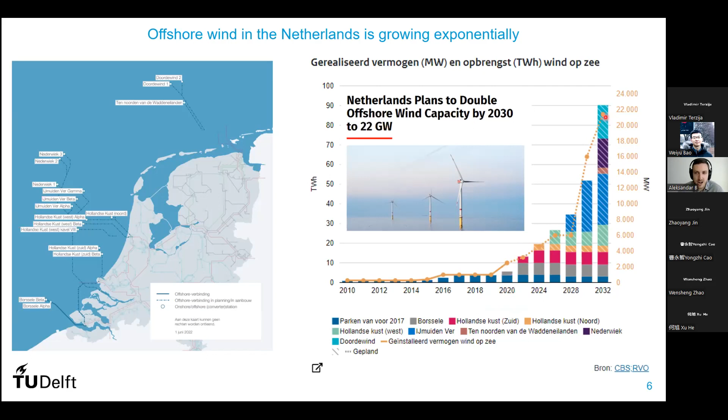So if you look at the plans of the Netherlands in terms of renewable energy, particularly here offshore, this here on the left is the coast of the Netherlands, and here we see the proliferation of offshore wind energy, which is currently at several gigawatts. By 2030, the plan is to have more than 20 gigawatts. So we have a really exponential rise in wind energy, particularly offshore wind energy, and this is something that is really affecting power systems already, and we can only imagine how it is going to affect power systems at this point, which is only 8 years from now.

emphasized and accelerated. I like to call this likely the biggest evolution or revolution in electrical power systems, probably since they were, let's say, invented by Nikola Tesla. But this new revolution is also bringing some challenges, and we as electrical engineers need to figure out ways to deal with them. So what are some of these challenges, particularly the dynamic ones that I'm going to talk about today, that we see with so many renewables?

If you look worldwide, let's say first with Europe, we already see several larger events happening lately. For instance, we had a system separation in Europe, which is operated as a single system, but due to faults, we had not one but several system separations lately, out-of-step conditions, which threatened to cause blackouts in certain parts of the continent.

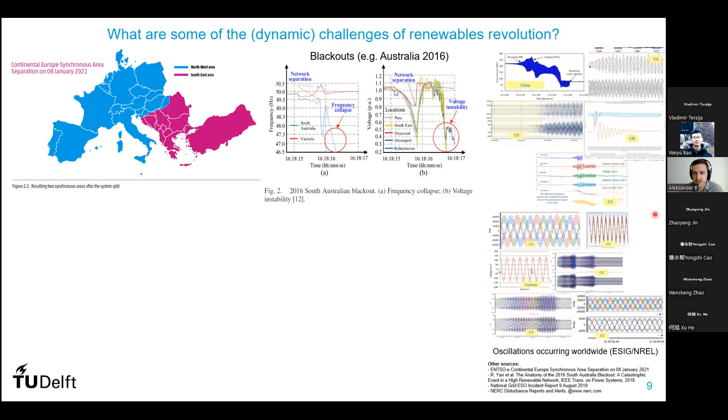If we look at the other events, we see oscillations occurring worldwide, from China to US, UK, also in Europe; in Germany, we saw something with offshore wind energy. Furthermore, in UK as well, there was recently an event where a lightning strike quite far away from an offshore wind farm caused the wind farm to trip, and that kind of cascaded and caused 1 million people to be in dark for some time.

And what we also see in the US, for instance, which is very interesting, is that a lot of renewables are not complying that well with ride-through conditions, and that we see due to that some more risks of cascading. So, for instance, if you go to the NERC website, you'll see a lot of disturbances that have that kind of effect. So there are a lot of challenges that we see, and we are still in some way at the beginning of the energy transition. So we can only imagine how this is going to escalate in the next decade or two.

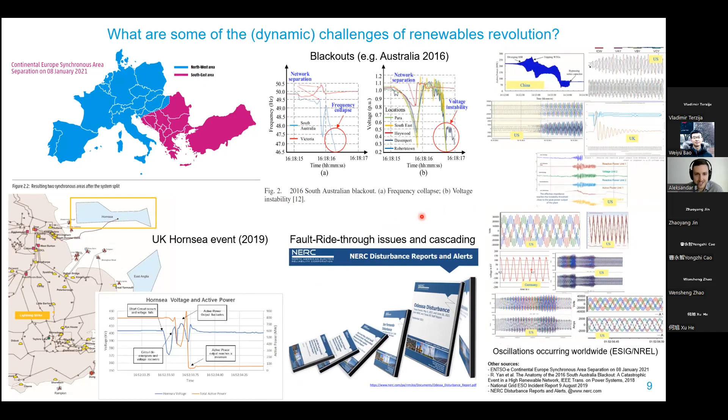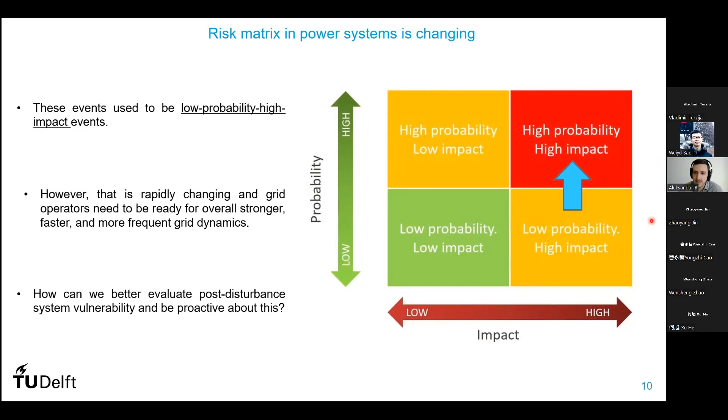So if we think about this in terms of risk in power systems, these events that I just talked about used to be low probability, high impact events, but that is rapidly changing. We see much more frequent events like these. We see them happening faster, and we see them happening with more enhanced deviations in voltage and frequency. And the question that we come to is, how can we better evaluate these vulnerabilities of the system and maybe be proactive about this and be ready once they start occurring even more regularly in the system.

I'm going to give a couple of slides about a bigger project that I'm part of, RESIDENT. So RESIDENT stands for Resilient Synchro Measurement Based Grid Protection Platform, and it is a project led by Professor Marjan Popov, but we have a lot of people involved in it. And the motivation of the project is very much in line with what I was just talking about: the challenges that we're dealing with controlling future electric power grids, particularly in terms of reduced system resilience, in terms of inertia and system strength.

And except for utilizing the known methods and the known ways of handling and tackling these events, we're also looking into applying modern measurement units across the system, such as phasor measurement units, also some sensors that we have in the Netherlands, and combining them into a wide area monitoring approach, but also wide area monitoring, protection and control applications. So we have several work packages in this project. The first one deals with developing a platform for testing all of these applications. The second one deals with some machine learning and AI methods for detection, localization, and classification of disturbances.

We have another work package on controlled islanding to derive a method for coherence identification of generators and detecting out-of-step conditions and doing some sort of a controlled separation of a system, and not allow the system to split in the way that, let's say, it wants, but we could do it in a controlled manner to avoid blackouts and have the separate islands that will operate stably after the separation. And in the end, we have the grid vulnerability and cascading events work package, which is on developing algorithms for vulnerability assessment.

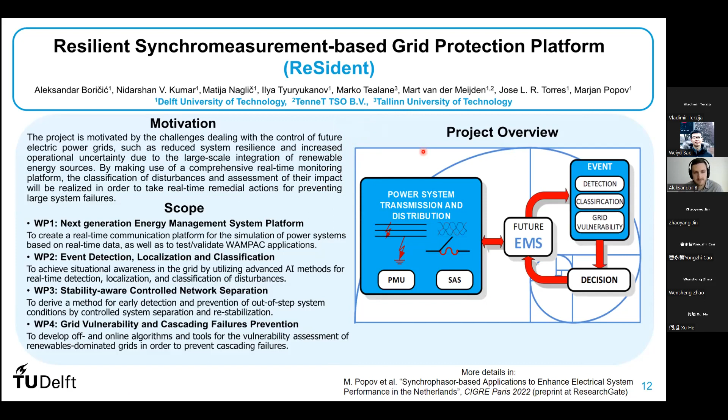If you want more information about this project, we recently had a paper in Paris, in CIGRE. I think that's a very good overview of things we do. You can probably find it online. It's also on ResearchGate if you cannot find it on CIGRE. And there we have some more information about all of these topics that I mentioned.

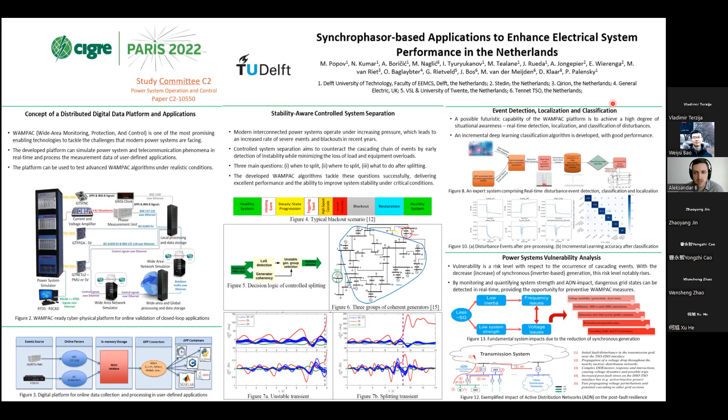So with all this shift to renewables, why and how are systems becoming weaker? Why do we need to think about this more than we used to in decades previously? So it all comes back to synchronous generators in a way. Since we are reducing the number of synchronous generators and instead putting inverter-based resources, on one side we have lower inertia because of the ability of synchronous generators to store kinetic energy in their rotating masses. We're losing that ability with installing inverter-based resources, and that low inertia causes frequency issues.

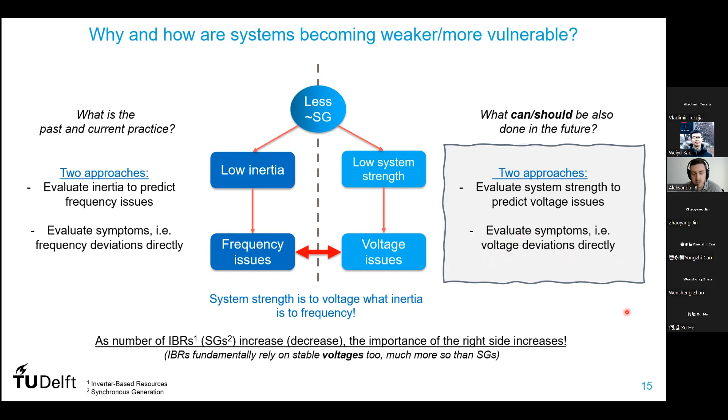So if we look at the current practice in the industry, we have a lot of ways to evaluate inertia, and then also different ways that we can evaluate frequency deviations directly, so we can try to preserve system stability in that sense. On the other hand, what we need to do, and should do more in the future also, is how we can evaluate system strength, so we can predict voltage issues, and on the other hand, the issues themselves, how we can evaluate them. As I like to put it here, how do we evaluate the symptoms, or voltage deviations or instabilities, directly. So I'll be more focusing on this part today.

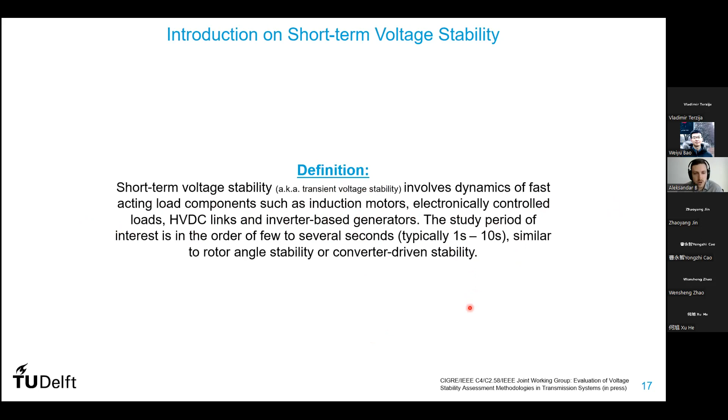So first, I'm going to talk here about the impact of distribution networks on short-term voltage stability. First, a quick definition. This is actually from the joint working group that Vladimir mentioned, that is now in press, and I think it should be published early next year, which works with voltage stability assessment in transmission systems. So short-term voltage stability, sometimes also known as transient voltage stability, but that term is not used that much anymore, involves dynamics of fast-acting load components, induction motors, electronically controlled loads, HVDC links, and inverter-based generators. And that's an instability that occurs typically under 10 seconds. It is very similar to rotor angle instability in a way, or converter-driven stability, but I'll talk about that a bit more later.

So what do we see in terms of changes in distribution systems? In distribution systems, the biggest change we see is the penetration of distributed energy resources. And if you look at it from the perspective of increasing penetration of DERs, if you have a very low amount of DERs, you typically do not see any problems in terms of operation of the system, and it's easily accommodated. As the number increases, you start to see some limitations. Typically, first in the distribution network itself, you see some short circuit levels being decreased or increased. You see some protection coordination issues, maybe power quality issues, occasional overvoltages. As you increase DERs more, you start to see some issues on transmission level as well. You see some congestions occasionally. You see voltage control and voltage stability challenges potentially.

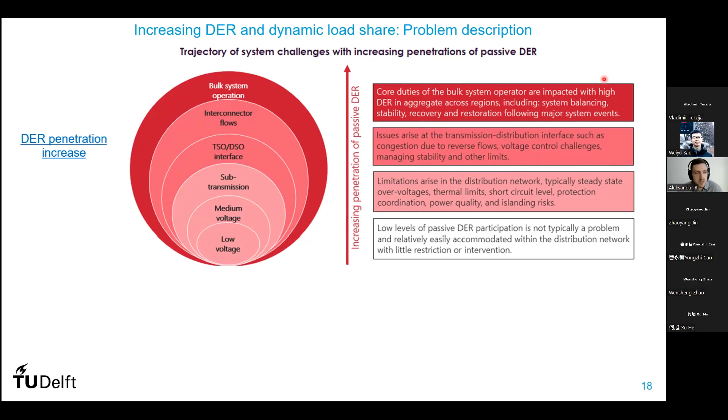And once we reach a very high amount of DER penetration, which is something that we're inevitably going towards, we see that the core duties of bulk power system operation become very impacted by DERs, and that is not just about reverse power flows or congestions, but we can see system balancing issues, stability issues, restoration, and many more things that come with that. So DERs and distribution systems are becoming much more impactful in the overall system operation, resilience, and stability. Except for these changes in distribution systems, we also have dynamic loads and electronic loads that have been more and more applied throughout power systems.

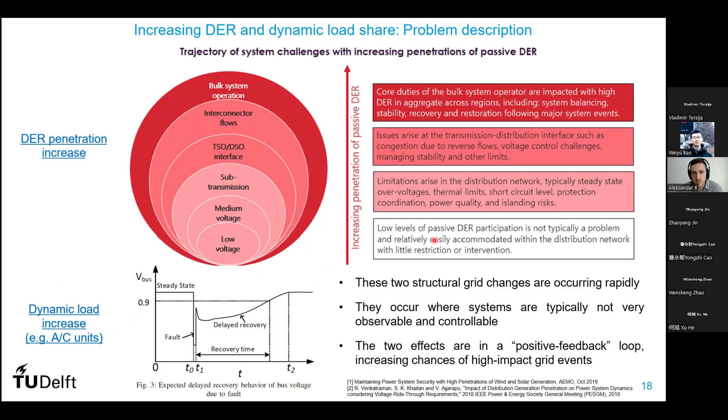So we used to have distribution systems that were very simple to model and simple to analyze, and we could predict very well what they would do in various operation scenarios. However, this is changing rapidly, and we see much more complexity there. And it's also interesting that these two changes are occurring in places in the system where the system is generally not very strong, not that much system strength in a way. And these two effects can also be what I call a positive feedback. So dynamic load increase can also result in more issues with the operation of DERs and vice versa. And that's something I'll also be talking about.

We did one case study in the southwest part of the Netherlands, where we have a lot of renewables, a lot of solar, a lot of wind, also offshore wind, and we see their grid operators are seeing much more dynamics occurring in the grid, and they're having trouble following and understanding what those dynamics are, where those dynamics are coming from, and how we can control them and maybe avoid them, and not let them cause some cascading issues.

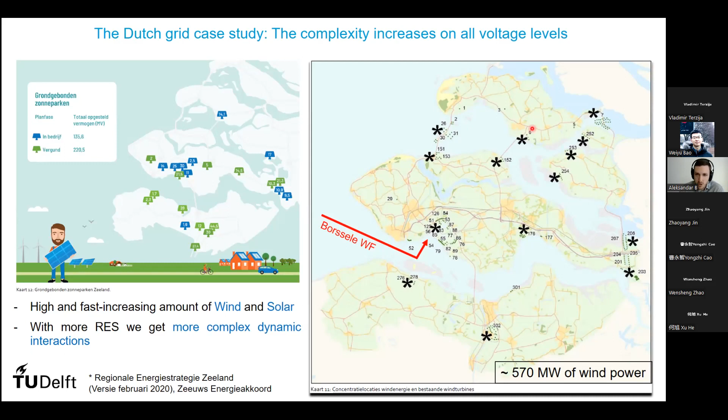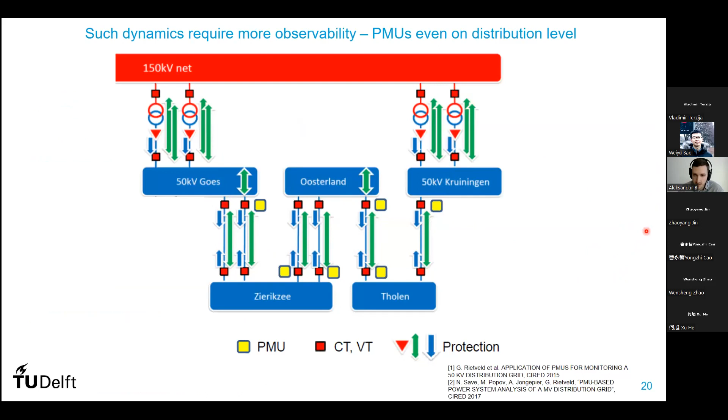So for instance, in this part of the grid, we also have installed PMUs. So not only on transmission system, but in this case on distribution system on 50 kV level, there are PMU measurements to try to pinpoint what is happening with these dynamics that we occasionally see with the large penetration of renewables on distribution level.

One study here we did was to model part of this distribution grid. So that distribution grid comes here on 50 kV level and is connected further on the transmission level. And we modeled one part of it in PowerFactory. And the goal of this study was to really model the distribution part, the load part, as detailed as possible, and see how that affects the results compared to typical models that we see being applied in distribution systems.

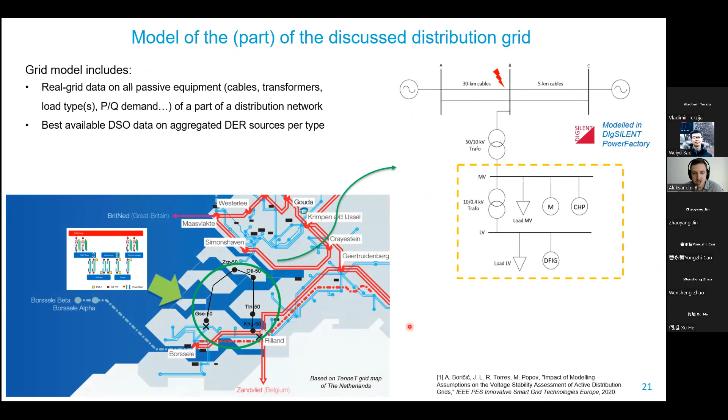So to model the grid, we use the real data of the grid. We use the best available data we have on DERs, because that's also sometimes an issue. You don't have all the information. You need to assume some things about renewables on distribution system. We use detailed controls using some standardized models.

We also applied low voltage ride-through requirements that are valid in the Netherlands, and the rest of the grid is represented by voltage sources. And then we subjected this grid to faults and recorded dynamic responses to see how these different variations of load or load composition affect the stability and performance of the system.

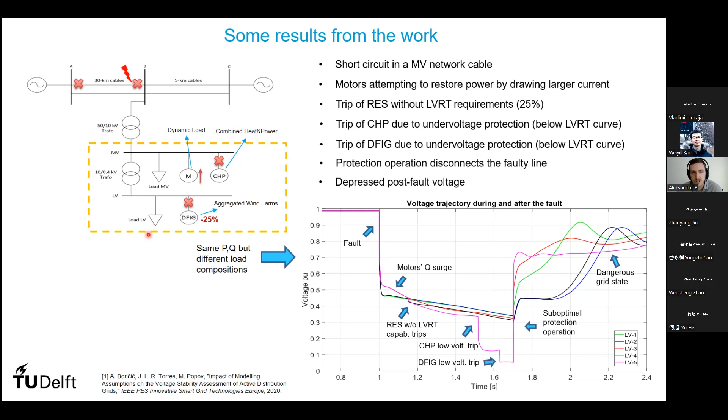Further on, we also have some combined heat and power plants here that as well have low voltage ride-through requirements up to a point. And in this case, we modeled where it would happen that they also drop after a certain voltage event. And furthermore, we get even more DERs to drop. And what we get in the end is basically a very different operation of the system with these load models or these active distribution network models compared to if we just did a very simple load and negative load for renewable generation.

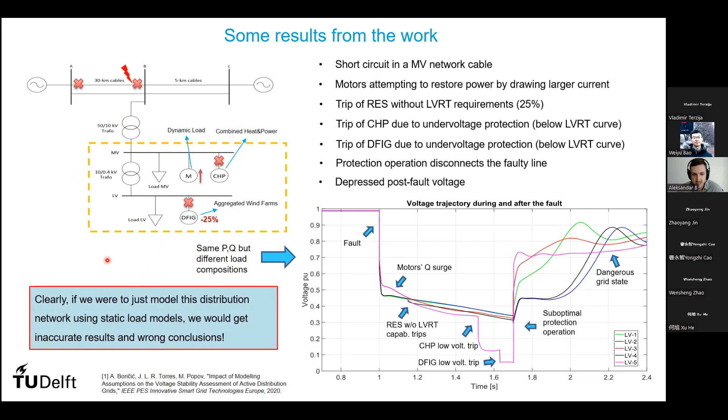So the main goal of this exercise was to show that if we were to just model the distribution network using static load models and very simple renewable energy models like negative load, etc., the results we will get for post-fault voltage behavior will be very, very inaccurate. And with that in mind, we went and expanded that study.

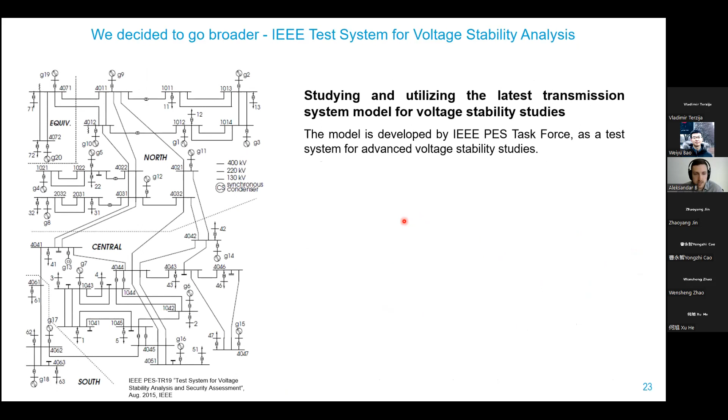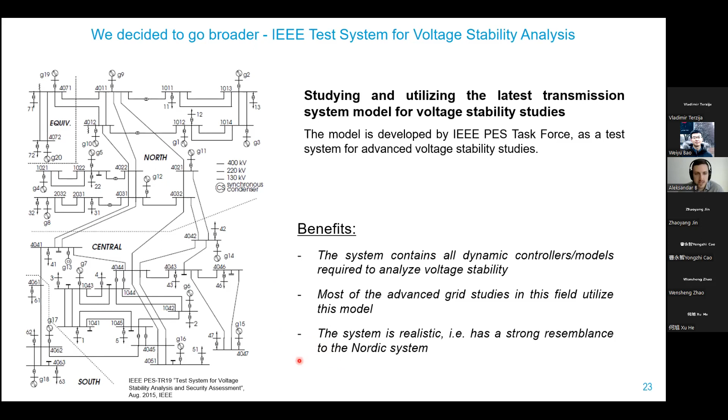We went much broader to not have only one small distribution system, but we went for a big IEEE system. So we used the IEEE test system for voltage stability studies, which is one of the latest models developed by IEEE, and it's very useful for advanced voltage stability studies. And the model itself contains all the dynamics, all dynamic controllers and models that we need to model these kinds of events. And we also see this model being utilized a lot nowadays in academia and industry. And the model itself is quite realistic as it is based on the Nordic system.

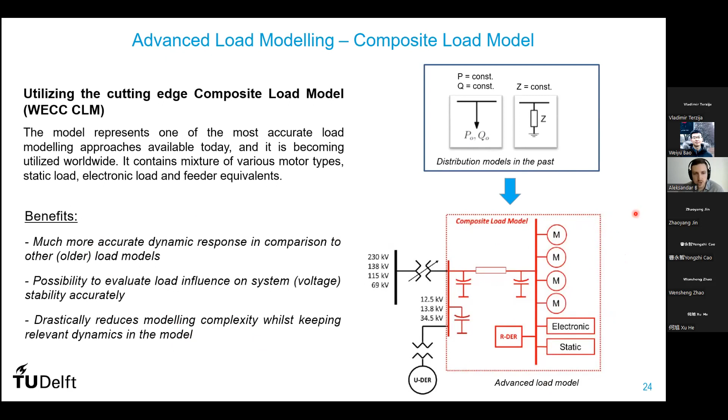We have motor types from A to D. They represented different types of motors in the grid. We have electronic load, static load. We also have DERs there that we will represent later. And this allowed us to have much more accurate dynamic response. And we can also play with different variations of these penetrations of different types of the load and see how that influences voltage stability.

Except from that, we also added a lot of DERs to the system. So in a similar manner, but this time using the new DER_A model, which was also very recently developed as a model which is much more accurate in representing behavior of distributed generation compared to previous models that were available. And it's also very much tweakable, so we can play with different parameters and determine how different control strategies of DERs, such as voltage ride through, such as blocking or disconnection, etc., how all of them affect system conditions. And particularly here we focused on short-term voltage stability.

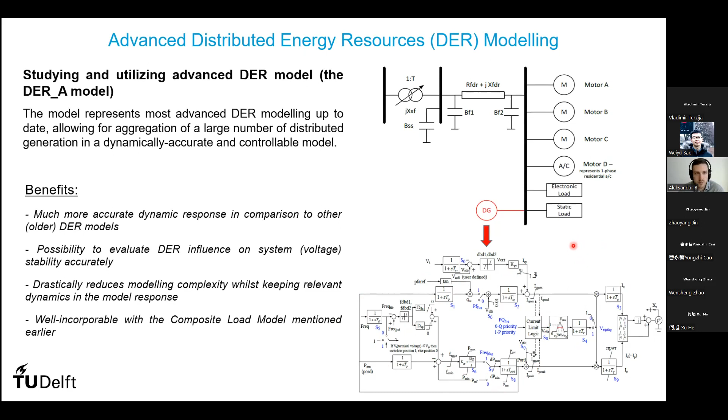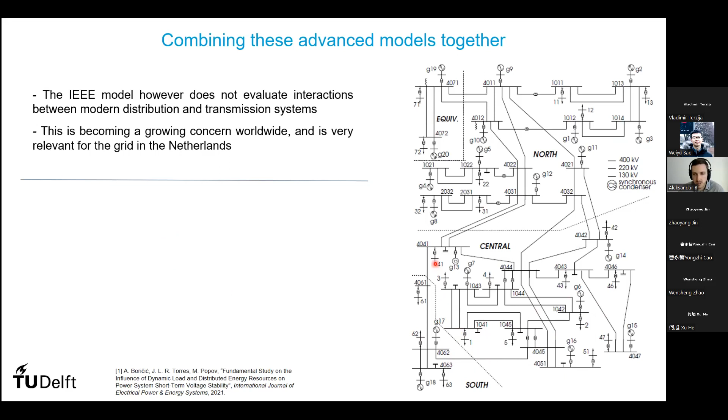So we started with this model. As it has very simplistic load representations, we decided we're going to enhance it. So we added a lot of more advanced load models in the central area, which is the most voltage instability prone area. And we also added a lot of DERs in that area.

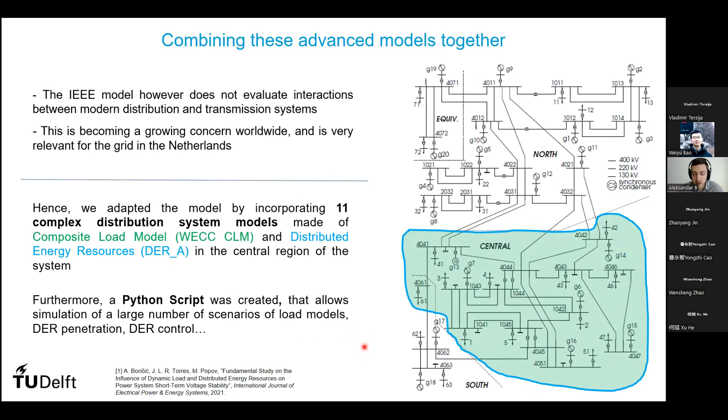Furthermore, because we're dealing here with a lot of complexity, we decided to do this in a more automated way. So we created a Python script to connect all of this in PowerFactory, so that we can simulate a large number of scenarios better and faster. So we use Python to allow us programming access to PowerFactory, all the model variables. We could use very fast variable handling, case scenario changes, data processing, and of course automatic scripting.

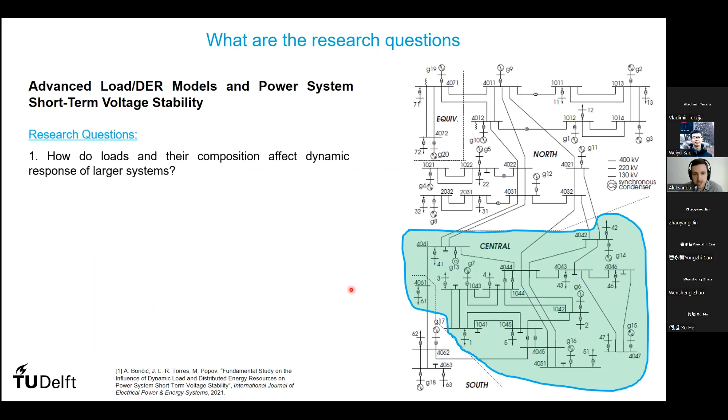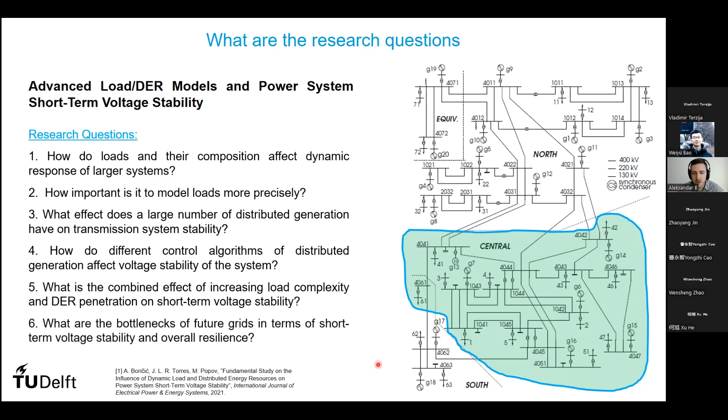So what did we want to find out with this research? First, we want to find out how loads and their composition particularly affect dynamic response of larger systems. We wanted to find out how important is it to model these things more precisely. So can we use very simple models, and if not, why? What effect does a large number of DERs have on transmission system stability? How do different control algorithms of DERs affect voltage stability? What is the combined effect of DERs and dynamic loads? And finally, what are the bottlenecks that we might see in future grids in terms of short-term voltage stability?

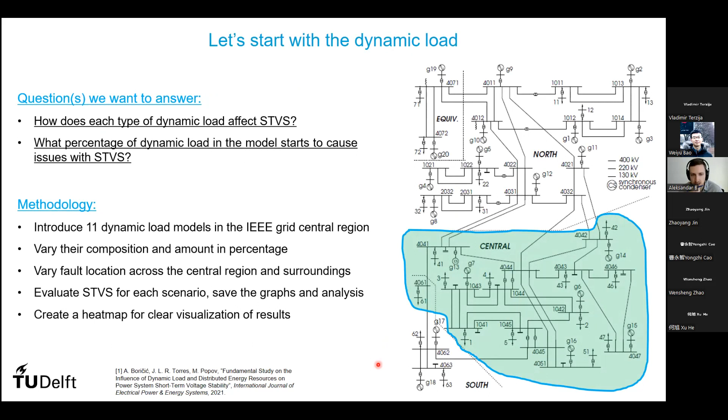So first, with dynamic load, we did the study with 11 different dynamic active distribution network models, basically. In this case, without DERs, just load models. We varied their composition, we varied their amount percentage, fault location, and all of that we did automatically in Python to evaluate short-term voltage stability for each scenario. And then we created results in sort of a heat map, so we can visualize more clearly what is happening. So this was one of the results from that.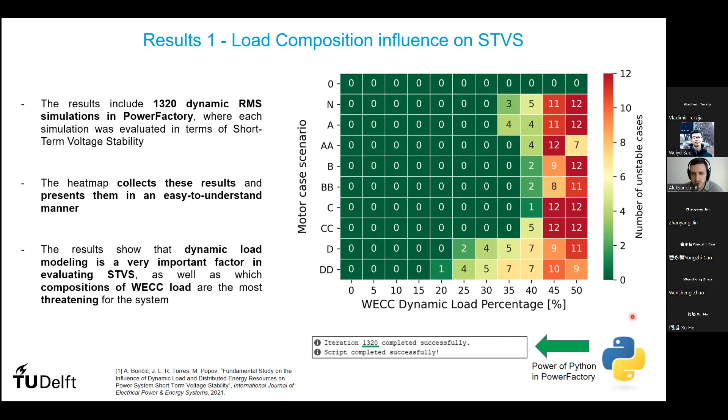We see, for instance, that type D motors, which are motors designed to replicate single-phase air conditioning, have quite a big impact on short-term voltage stability, and that is something we know also happens, for instance, in the US with their fault-induced delayed voltage recovery issues, but also elsewhere. We also see some other interesting patterns, like that motors of type A and type C are more related to instabilities compared to motors of type B, and we see which penetration percentages start to cause issues. So we can tell roughly that once we reach 30 or 40% of dynamic load, we might be experiencing issues in post-fault voltage deviations.

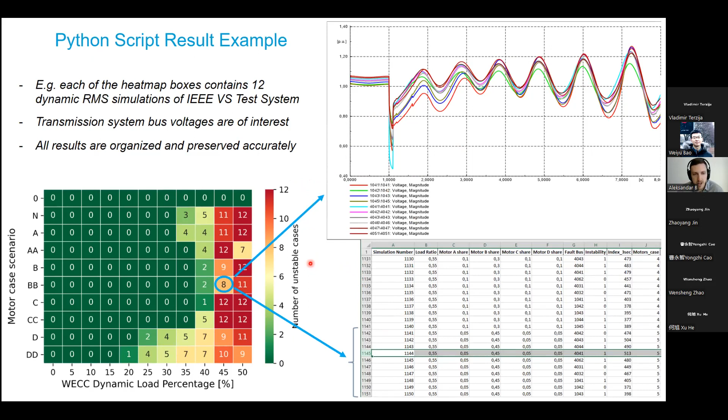Furthermore, this is just an example: if we take one of these results, in each result we have a dynamic simulation of a short-term response, and we evaluate that in terms of short-term voltage stability, record everything, and then see if we can find a pattern in which factors play the most role in instabilities. Furthermore, we introduced DERs to see how that will affect the response.

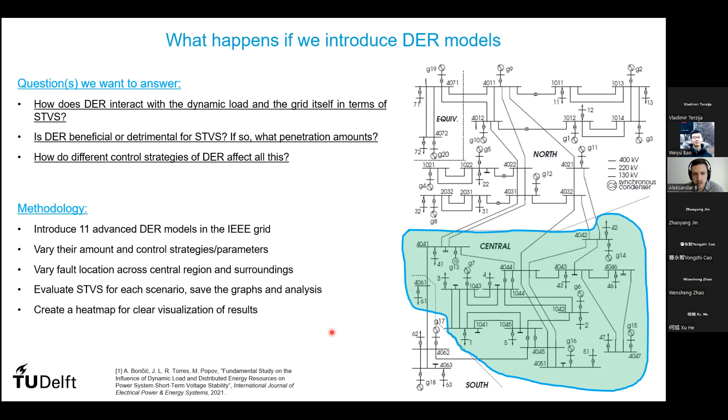So the main methodology here was similar. We would introduce advanced DER models, the ones I discussed before, in these distribution systems that we have in the central area. We would change their amount, we would change their control and parameters, again, different fault locations, and similarly, we create a heat map for visualization.

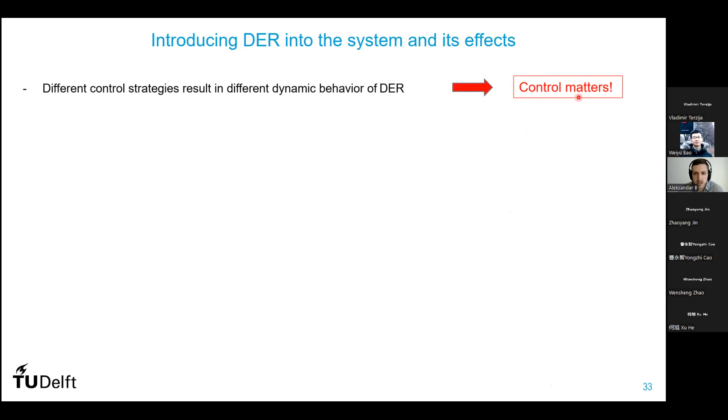In terms of controls, it is very important to keep in mind that different control strategies of DERs can result in very different dynamic behavior of DERs. So in other words, control can matter a lot. We modeled 4 types of control of DERs. First, we modeled very simple DER tripping in case a large fault occurs, which is something that we probably don't want to see in the system anymore, but it still happens a lot, as I mentioned in the beginning.

Then we modeled ride-through with 2 different control strategies, prioritizing Q or P. And then we also modeled momentary cessation or inverter blocking, where the inverter, after fault, temporarily stops injecting active power, which is blue in this line, and slowly ramps it up after the fault.

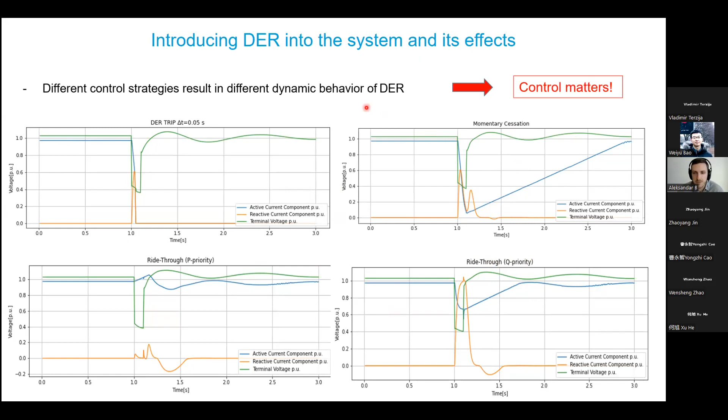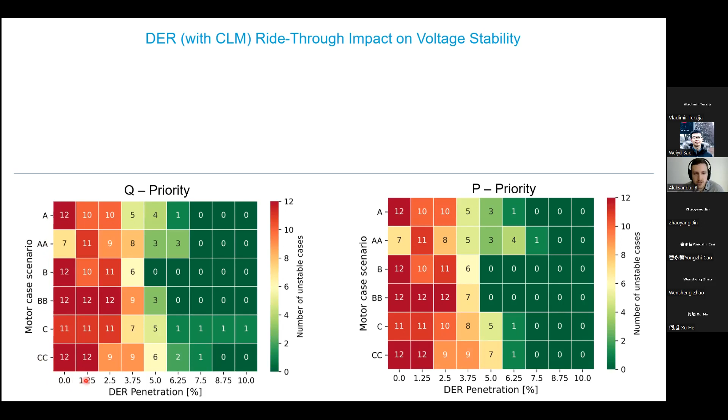So what kind of results did we find once we combined DERs with the dynamic loads, and how does that impact voltage stability? Here particularly we looked at two different control strategies for ride-through. We looked at Q priority and P priority. And similarly as before, we made a heat map. Here we have different types of load composition, and here we have different penetration of DERs from 0 to 10% relative to the system load.

And we saw that introducing DERs is positively affecting short-term voltage stability. Even if you start with 0%, you have a lot of instabilities occurring. However, if you increase DERs that respond by supporting the grid during the fault, the number of instabilities reduces very rapidly. So in that sense, we can say that DERs are positively affecting short-term voltage stability. However, system response here is heavily influenced by the control we apply, as I'll show on the next slide.

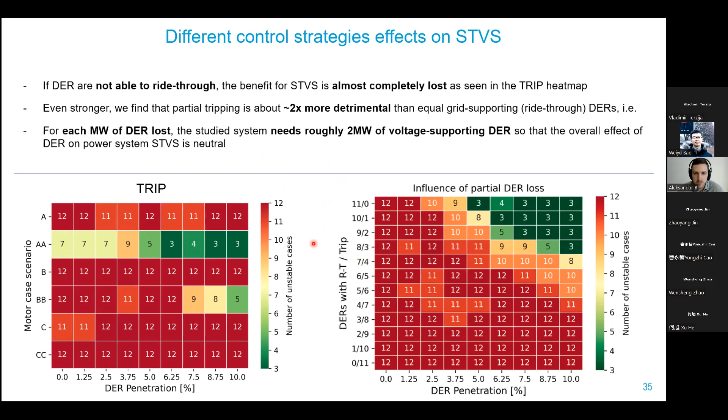If we look at similar numbers here, we see that the ride-through generators are not able to compensate for the tripping of DERs. So we show here that it's very detrimental for the system short-term voltage stability if DERs were to drop during or after the fault.

So to summarize a bit, what are the most important findings of this research? We had several research questions that I mentioned in the beginning. First, how do loads and their composition affect dynamic response? We see that higher presence of dynamic loads negatively affects short-term voltage stability, especially in types A and C, which are low inertia motors, and also in D-type or single-phase AC units. Second, how important was it to model loads more precisely in these studies? We found that it is very important, since dynamic response can drastically change.

What effects does a large number of distributed generation have on transmission system stability? We find that DERs can have both positive and negative effects, so it really highly depends on the control strategy in the end. You cannot make a general statement about how DERs affect short-term voltage stability. It really matters how they are controlled. And how do different control algorithms actually affect this?

We found that if the DERs do not ride through the fault, their effect is very negative on short-term voltage stability. However, if they do ride through, and if they have grid support, they can be very positive in terms of their effect. And what kind of effects did we see in combined increasing load complexity and DERs?

We saw that voltage excursions are becoming more enhanced, and they can be detrimental to the overall stability. And then, of course, it highly depends on the type of load, type of DER control, and the penetration we have, and also grid strength, something I'll talk about a bit later.

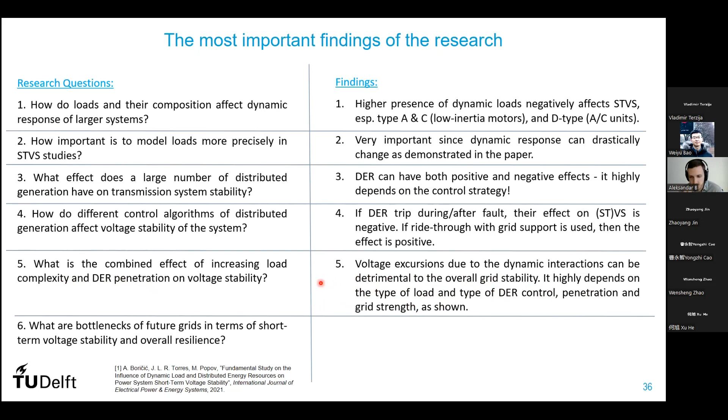So we really need to be careful about how we model these active distribution networks, and how we make statements about which type of active distribution network affects voltage stability in what way. It will really come down to the type of the loads, type of the DERs, penetration of each, and controls being applied.

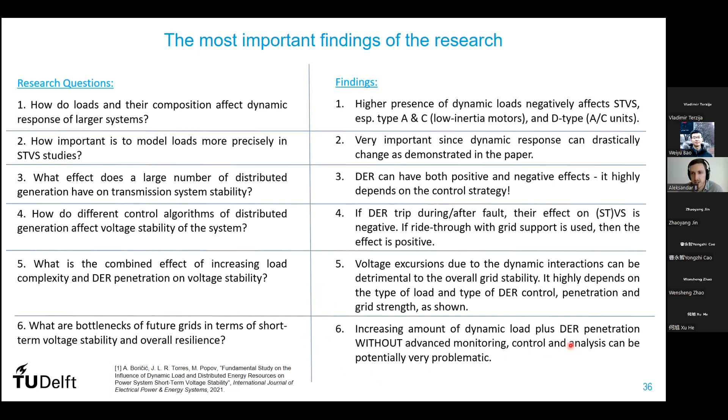And we also found that some of the bottlenecks might be that increasing amount of dynamic load plus DER without advanced monitoring, control, analysis can be potentially very problematic, especially if you apply very simple models, make analysis based on that, and expect systems to behave in a stable manner that may be very different in reality.

I'll move now a bit on a slightly different topic, but very related, which is system strength. So I'll talk about classification, some evaluation, and challenges. So if you ask worldwide, how do we define system strength? That is a difficult question. It varies. So the known way to define system strength was short circuit capacity.

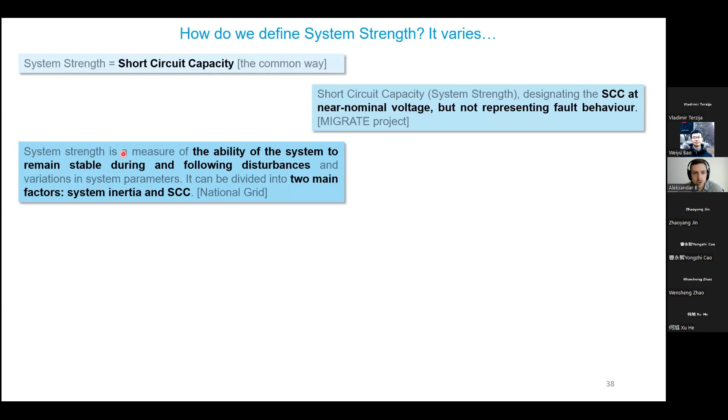However, that is changing. We see, for instance, from the Migrate project, a definition that says that system strength is a short circuit capacity at near nominal voltage, but not representing the fault behavior. We already see there confusion arising with short circuit capacity defining not fault behavior. Furthermore, we see National Grid defining system strength as the ability of the system to remain stable during and following disturbances in two factors, both inertia and short circuit capacity.

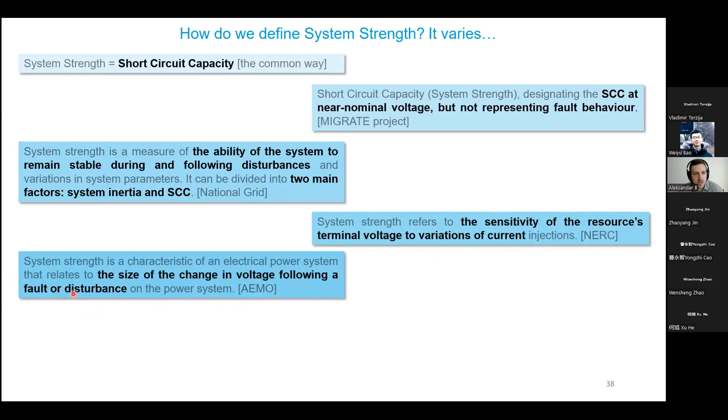We see NERC from the US defining system strength as the sensitivity of voltage to variations of current. We see AEMO from Australia defining it as the size of the change in voltage following a fault or disturbance. And we also see a different definition lately, which is the ability of the power systems to maintain and control the voltage waveform during both steady state operation and following disturbance. So there is no consensus in industry or academia what exactly system strength is. It is in a way all of these things, but we want to make it more consolidated.

But, Aleksandar, just to interrupt you now, in electrical power systems we know very well the term infinite bus. Yes. Can you just give a few words about what infinite bus is, and just relate it to all these plethora of definitions and very interesting approaches? So infinite bus would be useful.

Yeah, infinite bus will be basically a bus that if you try to inject some current towards that bus, it would not really affect the voltage because the bus has so much short circuit capacity that the voltage sensitivity is basically zero. Maybe this definition is closest to that. The sensitivity of the terminal voltage would be basically zero or very, very low. But not only voltage, also frequency. Yeah, here I focus on voltage, but of course you would assume there that inertia is also extremely high, so you cannot change it.

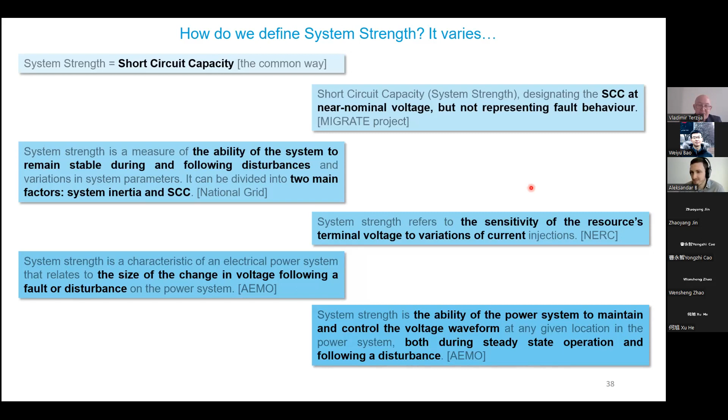Thank you. So I like to put here what is system strength, some analogies about it. If you have a system which is a rock or a jelly, and you look at network system strength from that perspective, if you would gently touch a rock, very little would happen, and other people in touch with that rock would not notice that, if it's of course a gentle touch.

However, if you do the same with a jelly, you will notice wobbles throughout the whole system. So everyone would notice the variations happening. So what is also interesting is that if more people would try to stop these variations, it may cause further variations. So it would be very hard to synchronize between those actions.

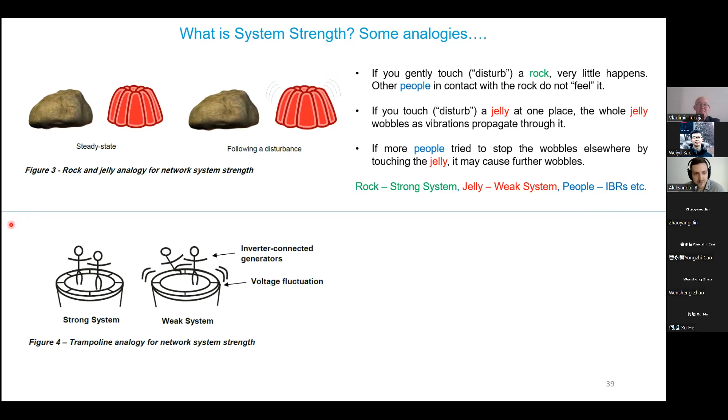And if we go back to power systems, here we will have an analogy that rock would be a very strong system, jelly will be a very weak system, and the people that I mentioned will be different sources connected to the system. Another nice analogy for this is a trampoline, where we have a strong system and a weak system. And basically, a strong system would be like a trampoline that has many springs. So if some variation happens, if someone jumps, the movement will be very slight and it's easy to keep the balance.

However, a weak system would be like a trampoline that doesn't have many springs. So if someone makes a disturbance, in this case we talk about voltage fluctuations, it will be very hard to keep the balance. And it will get even harder as other IBRs in this sense, or people in this analogy, would try to damp those oscillations. Again, it will be hard to synchronize those things well.

And a further problem is that some IBRs may trip or fall off, and then you have even further disturbances happening. So in this sense, springs would be system strength. And in our case for power systems, those would be synchronous generators.

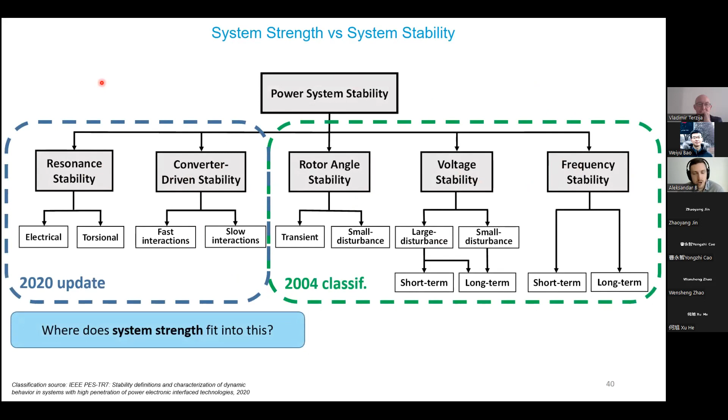So how do we approach this system strength versus system stability? If you think of system stability, we have 5 different classes of it. In 2004, we had these 3: rotor angle, voltage stability, and frequency stability. However, with proliferation of renewables, 2 new were added a couple of years back. And where do we fit system strength into this? We know it's not a type of stability, but what is it related to in all of this?

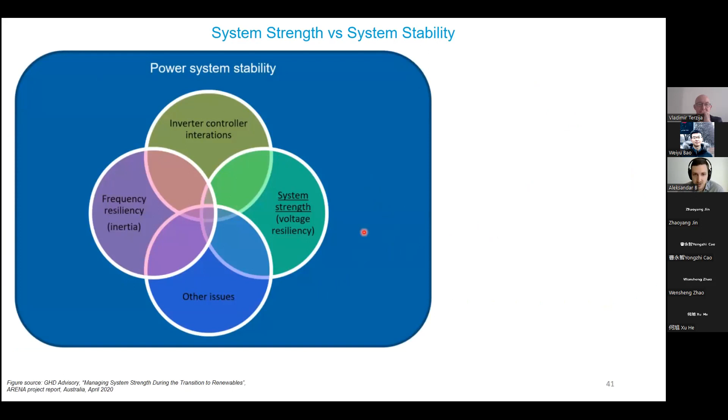So power system stability and system strength are related very much, and we can think of system strength as voltage resilience. So system strength is a measure of voltage resilience, same as inertia is a measure of frequency resilience. The more of it we have, the less variations we would expect given the same change in the system. And system strength primarily determines susceptibility to voltage instability. So the more system strength we have, the less likely voltage instability is.

But we also need system strength for some other things in the system, such as control interactions between IBRs, power quality, protection, etc. Because yes, if we have reduced system strength, we will also likely have reduced fault currents, and then we have potentially protection coordination issues as well.

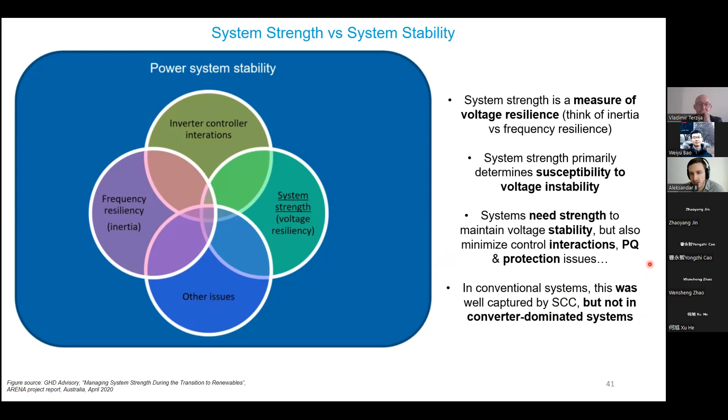In conventional systems, as Vladimir and I talked about now, this was well captured by short circuit capacity. But if we have converter-dominated systems, that might not be the case anymore. I will give some equations later, but it's because our very approach in defining system strength and our usage of Thevenin equivalents is no longer that applicable.

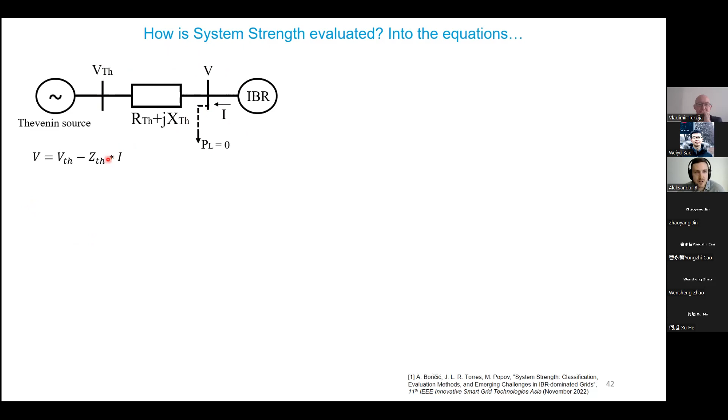So how can we evaluate system strength? The common and basic way to do it is to have a Thevenin equivalent. You have an IBR, you have some kind of short circuit impedance, and then you can calculate the voltage at this bus via the Thevenin equivalent. If you add a small deviation in current, you will have a small deviation in voltage, and you can easily calculate from there that the sensitivity of that change is directly related to the short circuit impedance.

You can also see that that is very related to short circuit capacity, and you can easily conclude that short circuit capacity is inversely related to the short circuit impedance, and that is related to the sensitivity. So the more short circuit capacity you have, the less your voltage to current sensitivity is, and vice versa with the grid impedance.

So the common way was to simply calculate the short circuit ratio, which would be short circuit capacity divided by the power of your IBR or any other change in the system that you might have experienced. And you would say, okay, if this value is above 3 or something, depending on the system and the application that you're looking at, we have a strong enough system. Otherwise, we might have some issues with weak systems. However, we already see a problem. What if this IBR is not just one IBR? What if we have more IBRs?

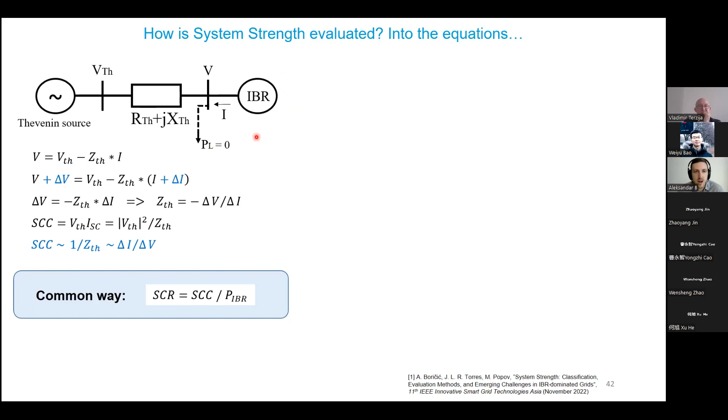One approach is to use a weighted approach. This is something that Texas does in their grid. So you kind of find a weighted sum of all the IBRs and short circuit strengths in the system. But then if you do this, you're instantly assuming that all IBRs are operating at the same bus and that they fully interact with each other. You ignore the impedances between them in the grid.

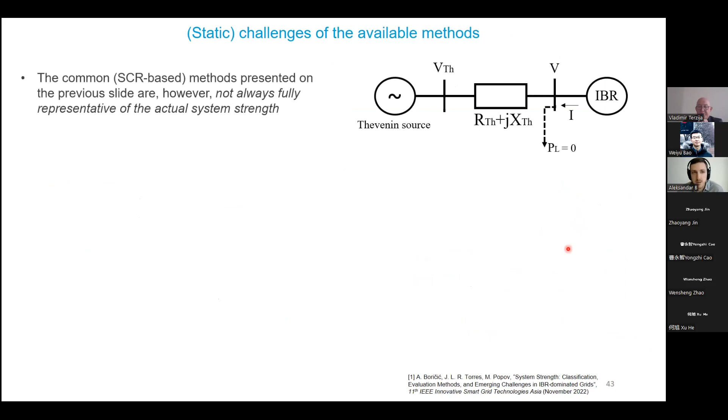So if you want to account for the actual grid impedances, you can also do that mathematically, and you can calculate the so-called site-dependent short circuit ratio, where you can calculate exactly how these different IBRs would affect the short circuit capacity. However, even if we do that, there are still some challenges that remain and emerge. So if you think about static or steady state challenges of these methods, if we come back to this example, they are not always fully representative of actual system strength because of several things.

First one is they don't take into account any of these things. They don't take into account local load. So if you have a load here, short circuit ratio doesn't reflect that in any way. But that load will very much affect how weak your system is. Because if you have very high load here, that will locally take a lot of this power, that power will not go further towards the system, and you will not have that power being injected into the, let's say, weak system. So more load would increase your system strength there, but you don't see that with your methods.

Furthermore, we don't look at the ratio of reactance and resistance. And that is also something that can affect the strength of the system. We don't look directly at what voltage we're operating at, and if we have some support there in terms of FACTS devices, or synchronous condensers, etc. And what is also important, we don't look particularly at small signal stability. We more focus on static voltage stability, but we do not look at whether this source can maintain small signal stability also.

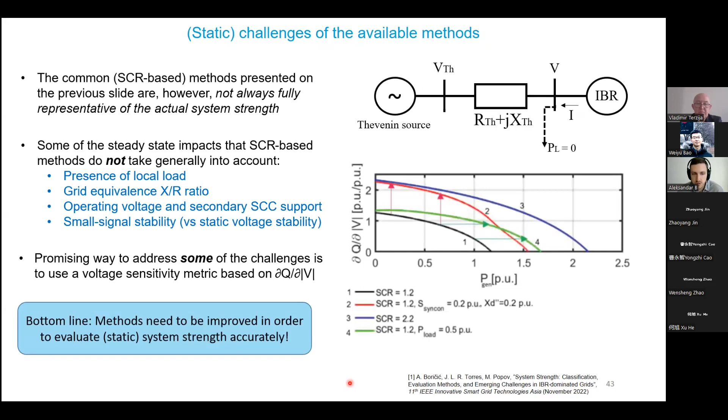Some of these challenges can be addressed by using the voltage sensitivity metric, which is a new method for looking into system strength. But again, not all of these, and we still need to think that some of these methods need to be improved to evaluate static system strength accurately. Some other dynamic challenges that we see of these methods. So most of the stuff I talked about now was on steady state.

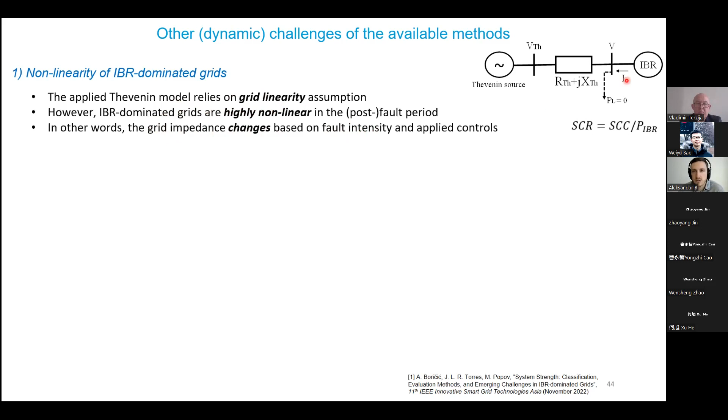Now, if you think about dynamic state, grids are becoming very nonlinear in dynamic state. So if you remember the Thevenin method that we apply here, it really relies on the grid linearity assumption. So if we want to create this model, we must assume that this is linear. However, we know that IBRs are not linear in the post-fault period. And that is mainly the consequence of IBRs having limitation in maximum current during faults, limitation in different control strategies that are being applied, and the different intensity of the fault or disturbance will change the grid impedance. So this impedance is no longer constant. It is a function of the fault and a function of the control of IBR. So this basically no longer becomes applicable if we talk about dynamic sense.

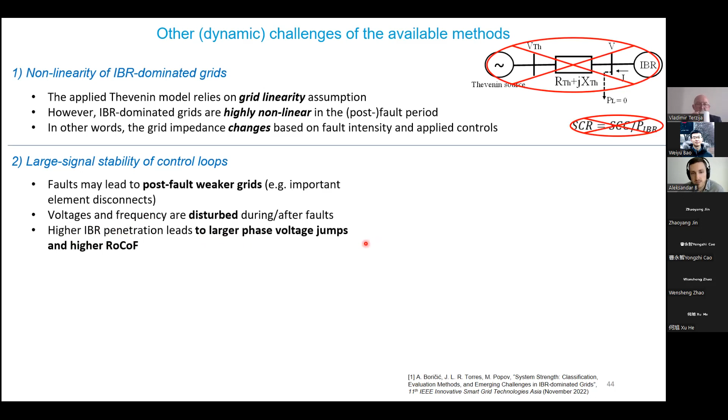Furthermore, we also have large signal stability issues. We can have faults that may lead first to post-fault weaker grids. For instance, if we lose an important line or an element, we have more disturbed voltages and frequencies because of everything I discussed before with the inertia and system strength. And we also have higher IBR penetration that leads to larger phase voltage jumps and higher RoCoF. And we see those effects particularly being problematic for PLL, and PLL is not able to keep up with the precise measures of system frequency and system voltage angle, and that we can see again affecting large signal stability. And that again you don't see in your short circuit ratios. And one IBR, even if it has a larger short circuit ratio, can be less stable in terms of dynamic operation.

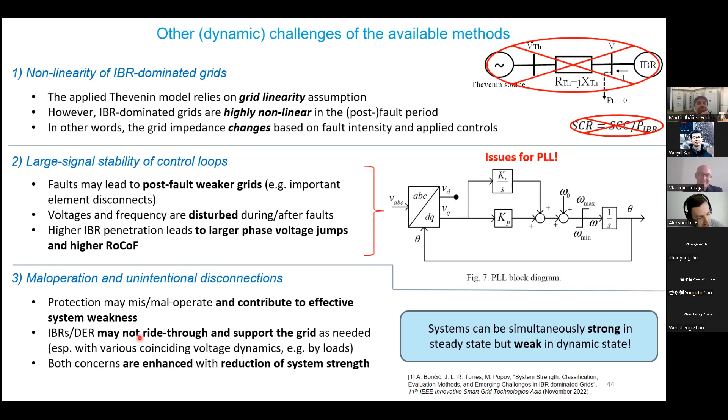Well, but we know, we are engineers. We know what we are talking about. Yeah, we call it differently. Sorry for such a long break. I was really inspired. Federico, we'll continue this conversation, which is very important. And please move forward, Aleksandar. No, I don't know how much time I have. I still have quite a lot of slides. You have enough time. Let's see.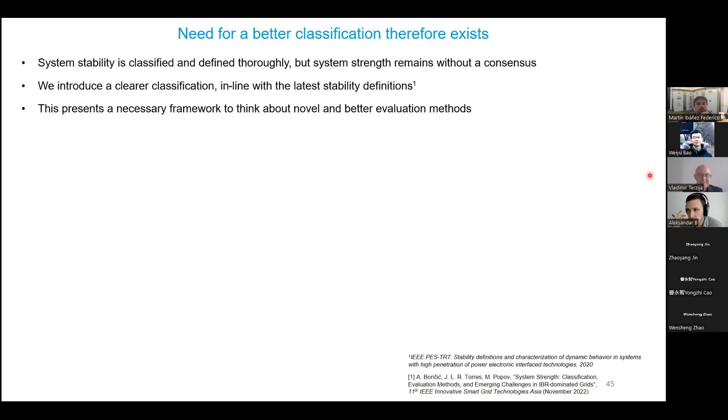Okay, so what I wanted to stress here, and what our paper that I'm going to present in Singapore really focuses on, is that we need to classify this better. We need to think of system strength in different ways. For system stability, we have a very clear classification. As I mentioned, those 5 types, we have them also in steady state and dynamic state, but system strength remains without a consensus. So we try to introduce a clearer classification, and we think this is important because it presents a framework for how we can think about novel methods and better evaluation methods that can capture some of the things that I've been discussing.

So what we propose is to have system strength split into steady state system strength and dynamic state system strength. If you talk about steady state system strength, you would talk about what many now call voltage sensitivity. So you think about short circuit capacity, steady state operation, small disturbances, linear operation. So you can do Thevenin impedance equivalents, but you also need to consider loads. You need to consider PLL parameters in very weak grids, because sometimes even if your grid is stable in the static voltage sense, maybe your PLL parameters will not allow it to operate stably.

You need to think about other short circuit support like synchronous condensers, and generally this can typically be modeled well enough by RMS models, sometimes a bit advanced RMS, except if you have a very weak grid model. So this is one aspect of system strength the way we see it. So operation near nominal voltage, small disturbances.

And the other part is the one we just talked about, dynamic state system strength. Here we really need to think about operation under transients, under large disturbances. There is no more Thevenin equivalence here, it's nonlinear. We need to think of it differently and not model it in such a way, because it's not going to reflect what actually is going to happen in the grid. We need to think about converters being saturated. We need to think about fault ride-through and interactions with the voltage dynamics, such as load dynamics we just talked about, control loops.

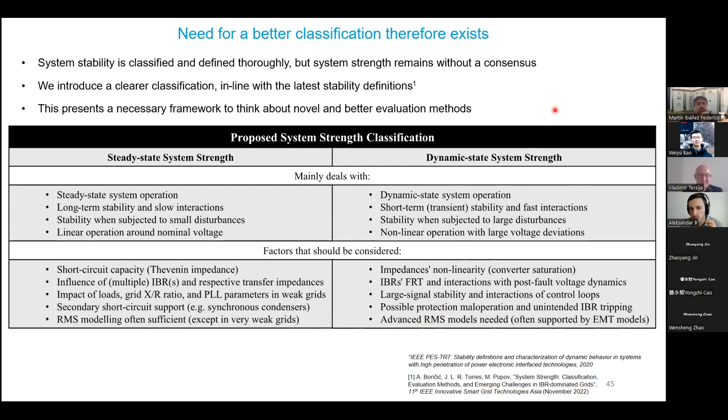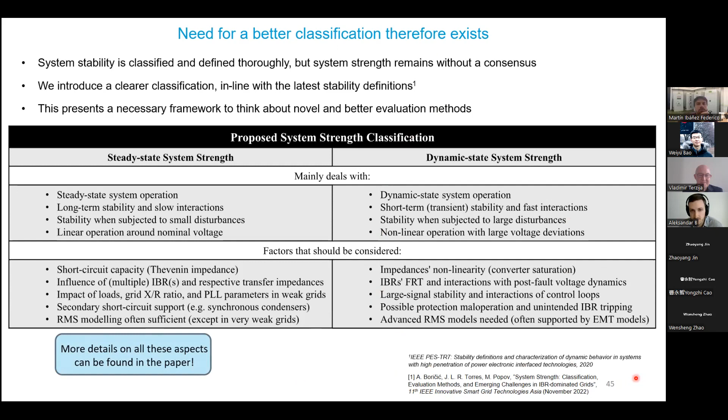So we see this classification very much in line with the stability definitions, because we have on one side steady state, on the other side dynamic state. But if you want to focus on evaluating them, you really need a very different approach for evaluating whether your system is strong in steady state or in dynamic state. There are more details in the paper that will, I think, soon be available on IEEE. But some conclusions would be that system strength is really a term with various and evolving meanings throughout the world, and we really need to think about consolidating this across academia and industry.

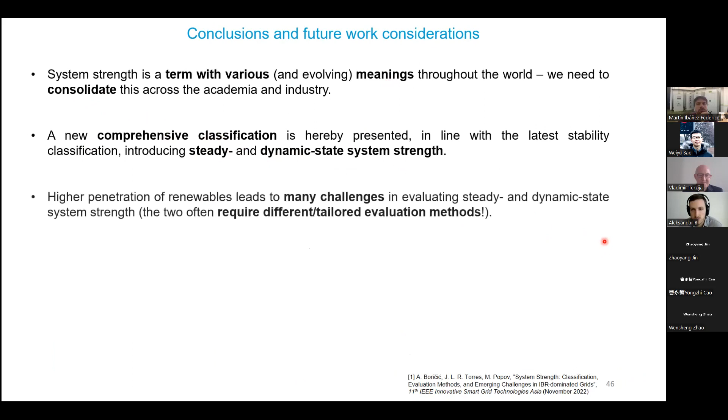We introduce a classification here where we split it into steady and dynamic state system strength, and then we want to use that to make better methods that can evaluate how strong our system is in both terms. So we see that higher penetration leads to many challenges, and we also see that we need different or tailored evaluation methods to see different challenges in steady and dynamic state.

For steady state, there are many methods already existing. I mentioned some, short circuit ratio and similar ones, but they're generally not well suited for renewable dominated grids yet. That is something we still work on. Hopefully we'll have some output on this as well. I'm working on a new method that might reflect this a bit better, but I still need to do some more work there. And also we need to think about methods that focus on dynamic state system strength.

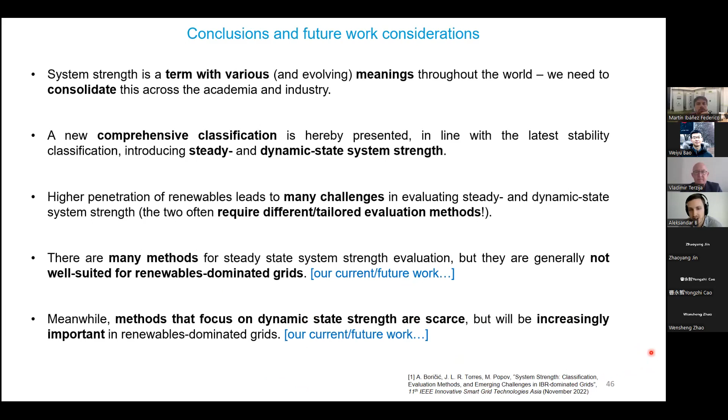So can we somehow quantify how the system will behave in terms of its strength in dynamic response? That is a bit of a more, let's say, challenging task, but it's a really different perspective from the steady state strength. And that is also something that we work on. So that was a part of system strength.

I also have one more part, maybe 5 or 6 slides. I don't know if we have time.

So what if we don't try to evaluate system strength, but we try to evaluate directly the symptoms we would get from these faults, either with many offline simulations, and then we can figure out which parts of the grid may be weaker in terms of fault behavior, or maybe with the real-time operation with PMUs and wide area measurements. So this part is more on the symptoms evaluation.

So think of severe short-term voltage deviations, not just short-term voltage stability. First, you have short-term voltage stability that we just talked about, which is generally occurring in grid sections with a lot of dynamic load, and generally it happens very fast and you have a voltage collapse in some way. This is just an example. It can look very different, of course.

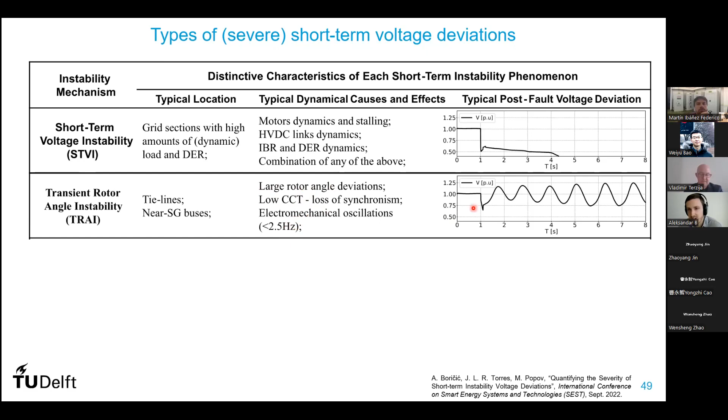Another instability mechanism that you see in short term is transient rotor angle instability. Very different physically, because it happens when you have large rotor angle deviations and loss of synchronism. But if you look at what happens with the voltage, you will also see very strong voltage deviations in the first 10 seconds of the event.

Then you have the fault-induced delayed voltage recovery, that we also mentioned, which happens where you have a massive stalling of induction motors, and generally you have delayed voltage recovery, sometimes a peak afterwards, which is not on itself instability, but it can lead to cascading or instability.

And in the end, you have something more appearing nowadays, which is converter-driven slow interactions instability, where you have remote areas or weak grid sections with low system strength. There you might have interactions between IBR controls and the grid or in between them, or also with the synchronous generators. And you may see oscillations, sometimes from 7 to 10 Hertz, but also in other frequency ranges. Generally, subsynchronous oscillations may occur. So these are, let's say, 4 different voltage deviations we might experience that may lead to short-term instabilities.

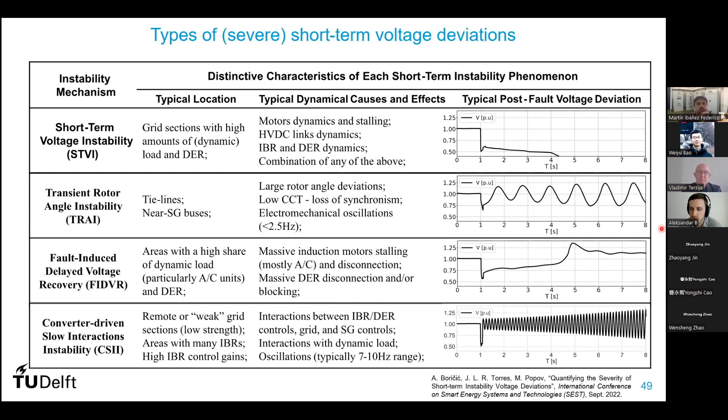So this approach goes more into what they all have in common. We know that all of them are initiated by a fault or a large voltage dip. They generally manifest in a short time scale, up to 10 seconds. They all lead to significantly disturbed but very distinctive post-fault voltage deviations. They tend to interact with each other. So if we see an instability happening, it will often be a combination of these, not just one of them.

And they happen to be more common or more severe when we have more IBRs or less synchronous generation in the system. And of course, this may lead to cascade. So the idea here is, can we create some kind of a unified approach that can tell us how bad the event that is taking place really is.

So if you look at the quantification methods now, state of the art, most of them focus on binary evaluation. So is an event stable or not? But the ability to quantify how bad the event is also needed, because we sometimes see the event either in simulations or in real systems, and it's very hard to tell by some kind of a number or a metric how bad this voltage deviation is. An engineer can have a look at it and tell you, okay, this is bad or this is not bad, but you don't have a number that tells you that.

So some numbers exist, of course. There is a transient voltage severity index that basically measures the time duration that the voltage is under a certain threshold and how much under the threshold, that you can calculate. But we wanted to try to improve that. So we want something that is able to detect and quantify severity of different deviations, that can work in both conventional and converter-dominated systems.

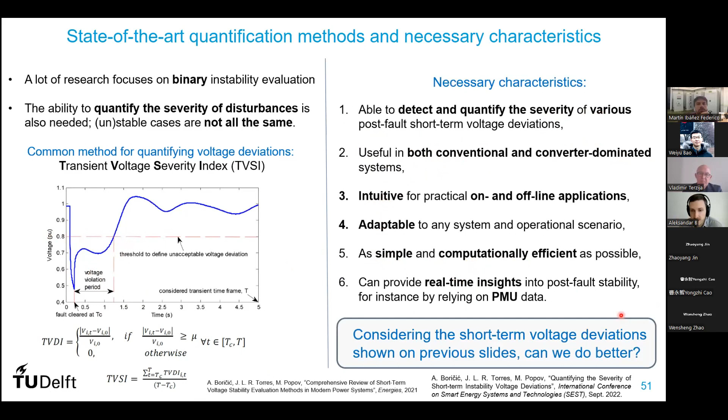We want it to be intuitive, adaptable. We want it to be simple and computationally efficient, because we want to apply this either fast in real time, or we want to apply it to a lot of offline simulations in an automatic manner. And we wanted to provide potentially real-time insights. So can we do something better than the transient voltage severity index, basically? So we developed here a methodology to evaluate this in a bit more, let's say, relevant manner.

So we developed something we call the cumulative voltage deviation metric, where we basically measure not just the under voltage deviations, and not just in a very simple constant way, but we measure them with kind of an envelope, and we measure how much the voltage after the fault deviates under or over this envelope. We translate that into a voltage deviation chart, where we can evaluate how that deviation progresses over time, how much of it is under voltage and how much is over voltage. And it is always applied after we see a large disturbance, so a large voltage drop.

And what is important here is this linear threshold that is, let's say, converging more as the time passes by; we give more weight to later voltage deviations. So if you have a voltage deviation here, it will be calculated with less weight than here, because here your threshold is increasing. So if you have a voltage deviation here, you know that voltage deviation that much after the fault is likely more correlated to potential instability, because the voltage still hasn't recovered after several seconds of the post-fault behavior.

So if you calculate this index of the total deviation, the larger the index is, it gives you a higher chance of various instabilities, potential disconnections, or cascading risks. So this doesn't tell you exactly if the system is stable or not, but it gives you a clear number that tells you how bad your voltage deviation is.

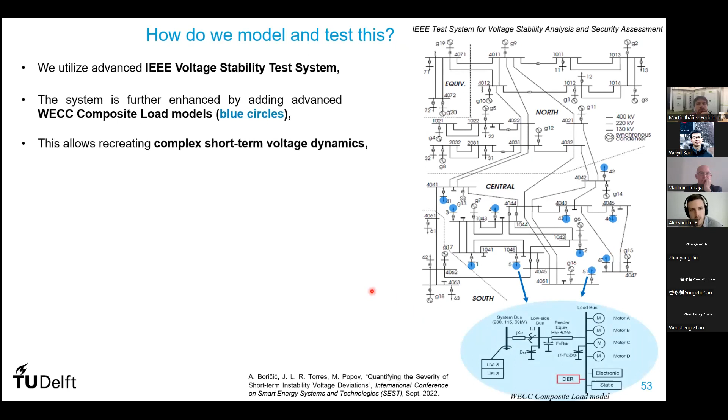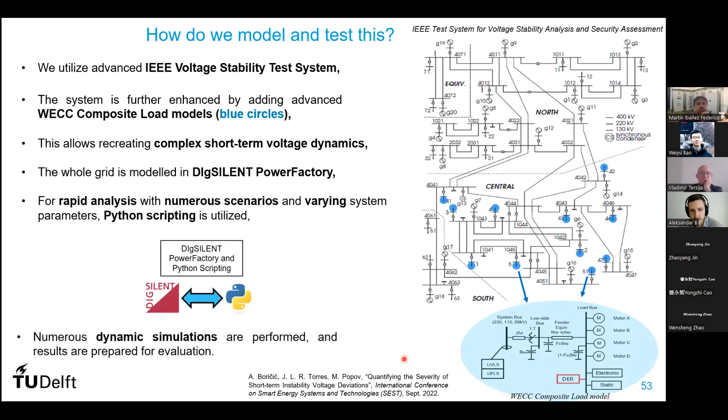So we did some models and testing to see how this behaves. So again, we used the similar test system as before with DERs and dynamic load models. We did everything in PowerFactory again. We did everything with Python. It's very important here that we are able to model many different cases with many different parameters. We talked about how different parameters may affect this operation very differently, like different control strategies, different penetration of different loads, etc. So we really need to be able to go through many cases fast, which manually is simply not feasible. So we run numerous dynamic simulations, and then we see how this method performs.

So what we did is we ran many cases and compared the cumulative voltage deviation and the transient voltage severity index. We did it for several different types of voltage deviations. And first, we have here 25 different cases of fault-induced delayed voltage recovery. The red one presents the least severe one, and then we increase severity by increasing the number of motor stalling or the penetration of dynamic load in general.

And then we try to quantify that with these two metrics. And what we see here, if we use transient voltage severity index, we see that it inaccurately tells us that this case is the worst in terms of how bad the voltage deviation is, that it gets better afterwards, but we know that's not the case. However, we see that the metric we introduce gives a much better operation here, and we can tell clearly that the further we go with our scenarios, the worse the case gets. So we're able to quantify this.

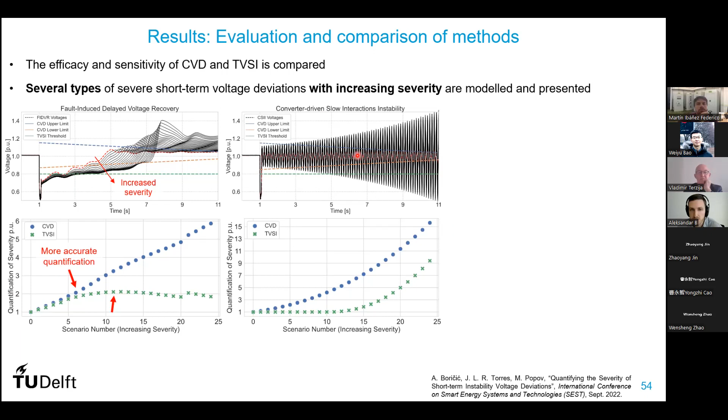In the different simulations, we also simulate oscillations with different amplitudes, with different frequencies, and we see a very similar effect. We see very low sensitivity on TVSI, but much better sensitivity for our method. And we do something with a bit more combined instability. I mentioned that often these instabilities can also be intertwined. So we model fault-induced delayed voltage recovery that leads to rotor angle instability. And again, we see much better operation here in terms of quantifying these events.

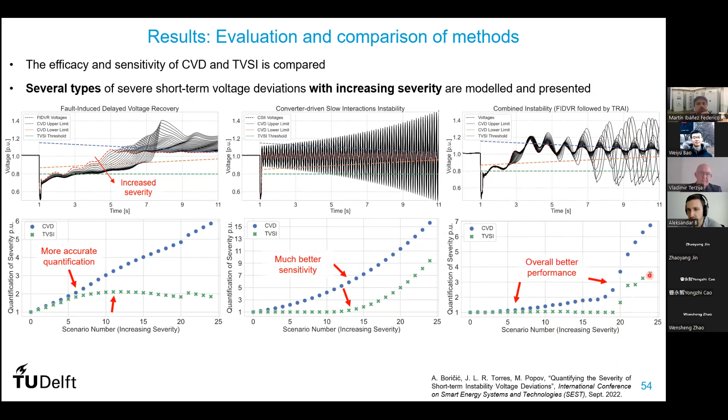So let me see what I have here. Yeah. So the idea is that we can give a number that really tells us through our simulations, or maybe in a real-time operation, how bad is the event that is taking place and how much our voltage is deviating from the normal operation. And if we know that characteristic, we can then design systems or control them in a way to avoid these dynamics. So that is also a very recent paper, and we're now working on a journal paper that continues on this.